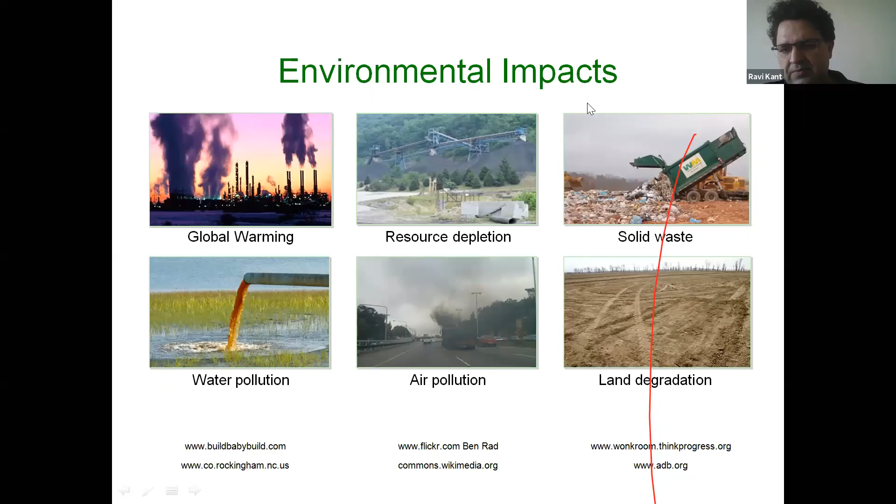Now, if you look into these issues which I just discussed, many people, if you ask the government also, those who are involved in solid waste management, say that it is very difficult to control, and it has been happening for years, so it is problematic. Or many have a perception that it is basically a material problem. And then there is the question: can we solve this particular problem?

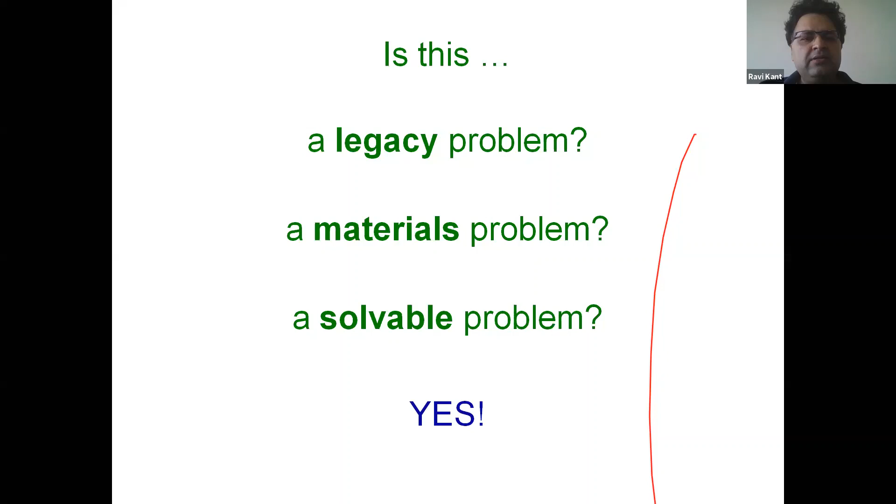These problems can be solved using the design for environment concepts. What is design for environment? It is a method to minimize or eliminate the environmental impact of a product over its life cycle. See, all products, from when they are manufactured, through their use, and after their use, this comprises the life cycle of the product. So we will discuss what is the broad life cycle.

But if you talk about the environment, then it has to be maintained over the entire product life cycle. Life cycle means when you are sourcing the raw material for making that product, when you are manufacturing it, transporting it, using it, and after the use when you are disposing of it. Effective design for environment practices maintain or improve product quality and cost while reducing the environmental impact.

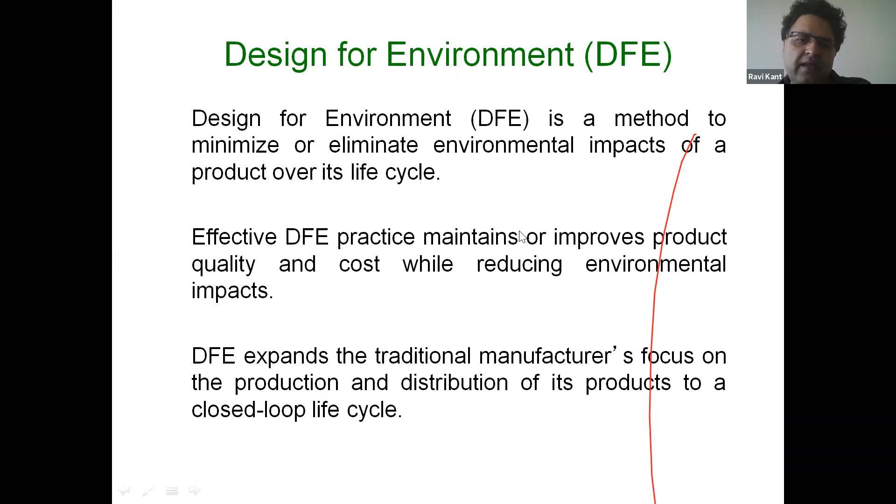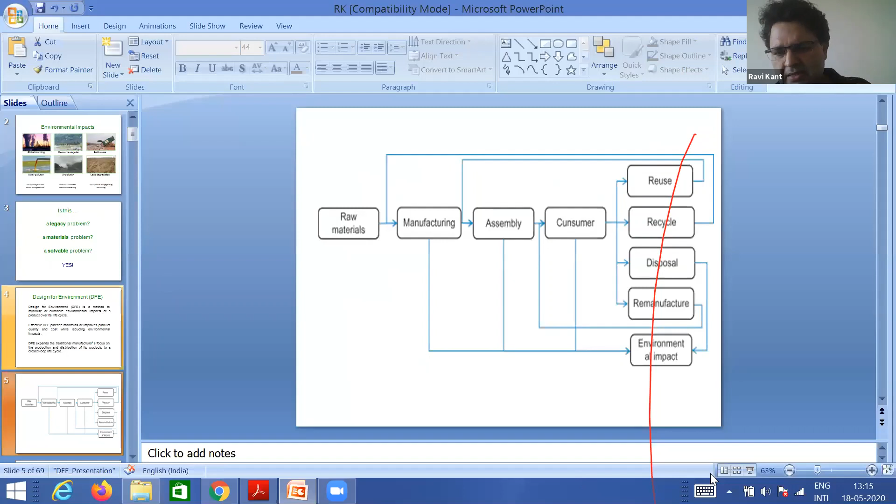So the major issue is that we are not compromising on quality, and it should also be seen that in making a product environment efficient, we should not unnecessarily increase the cost. Now, this is the screen which I purposefully put at the start. What is basically happening with the manufacturing or the product which we are using?

See, we have a raw material. This raw material is sourced from somewhere. Then we are manufacturing a product. Then we are assembling it. Then we are consuming it. And then there could be possible ways: either we can reuse the product, recycle the product, safely dispose of the product, or remanufacture the product.

Now, if you look into these cases, when we are disposing of a product, it is making an environmental impact. Now, how can we design a product which can be reusable, recyclable, remanufacturable, and if not these three, it can be disposed of safely to minimize the environmental impact?

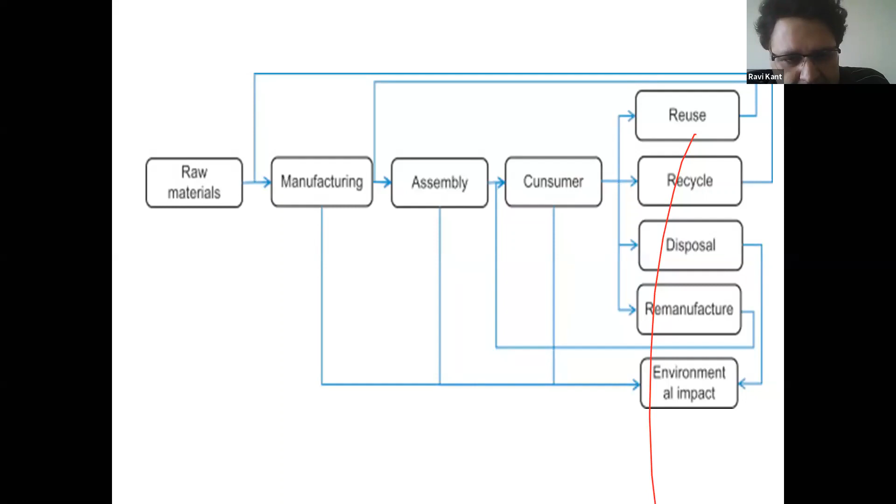If you do not think about reusability, recyclability, and remanufacturability during a design, then the major impact will be that when a product completes its useful life, so many recovery activities become impossible. If not the whole product, we should at least identify which components could be recycled, reused, or remanufactured. So our whole focus becomes the design part, where we have to design a product as per environmental needs.

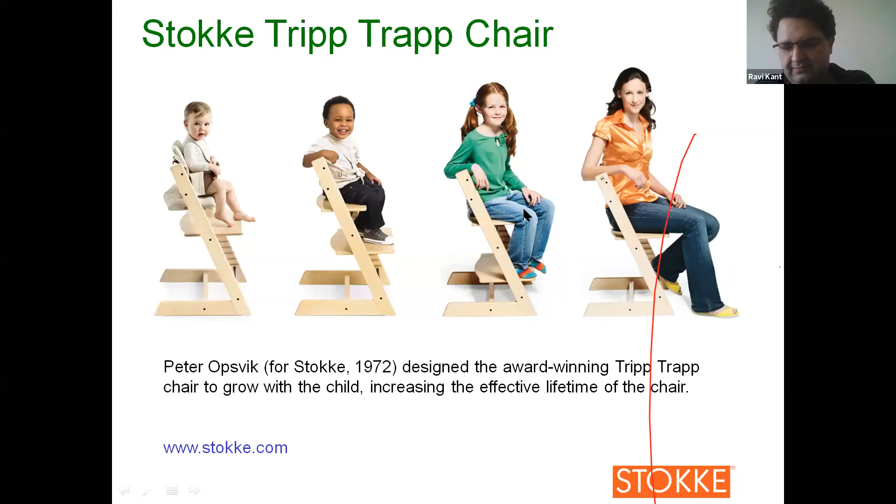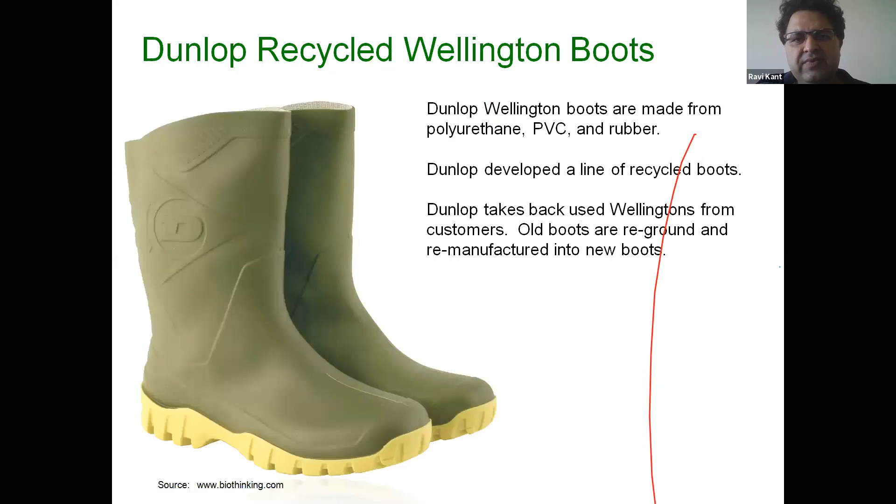Now let us go further. This is another example of design for environment, the Dunlop recycled Wellington boots. These boots are made of polyurethane, PVC and rubber, and all these materials are recyclable. They also have a policy where you bring the old boots and take new boots, and the old boots can be reground and remanufactured into new boots. This is a very good example where you can make shoes which can be recycled.

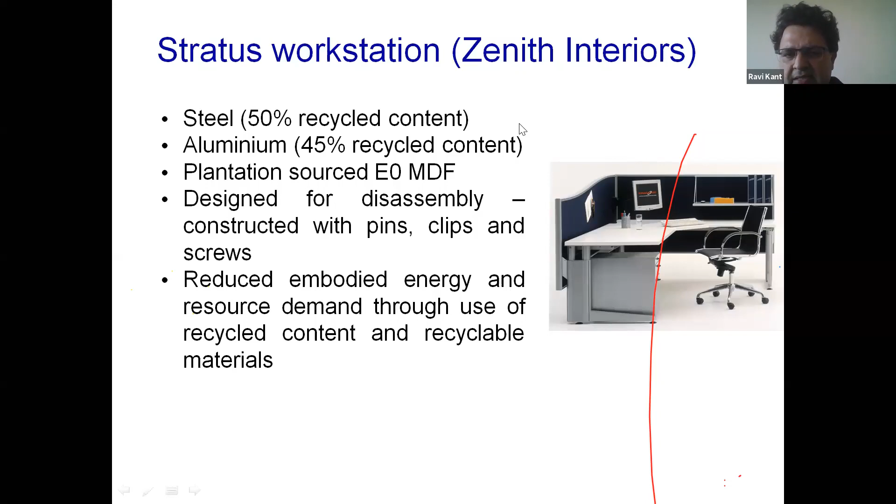Can we come out with technology to remove the yarn or threads from the cloth? And if we have a ready reckoner technology available cheaply, you can remove the thread or yarn, and then the same can be reprocessed and used into new cloth. So that is the bigger issue which we will be discussing.

Now this is another example of design for environment - this car by Daimler Chrysler, which is 2.5 meters long. What environmental guidelines have been used? Protection to the environment - they might have used environmentally friendly materials. The vehicle is energy efficient, and this energy is also one of the important issues.

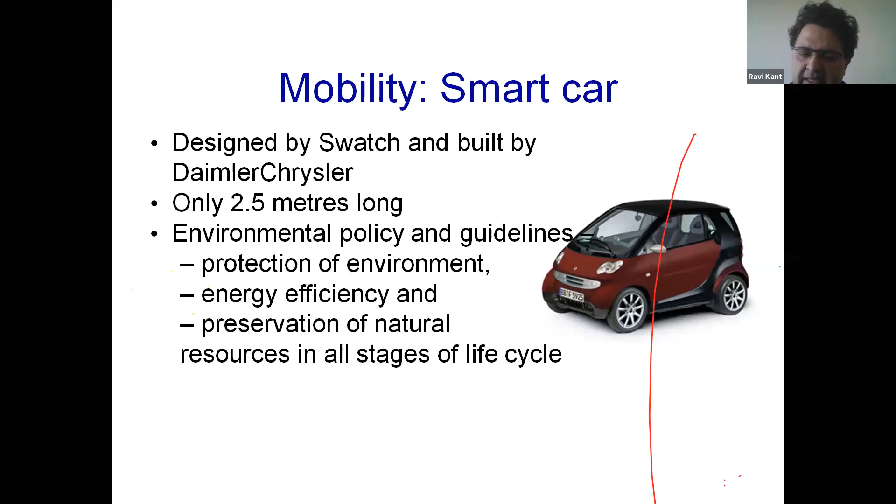When you design a product, and when it goes into production, if it consumes more energy, then we cannot say that it is energy efficient. Because of this reason, design for environment also looks beyond the perspective of design for assembly and manufacturing. You design a product which can be efficiently assembled and manufactured, and then the next stage you can think of introducing design for environmental concepts - or vice versa, the things can be possible.

Now this is also one example - the bathroom, Caroma Smartflush. We are not worried about that particular front, and when we go to the toilets, bathroom, we freely pour the water.

Now just think of a building which has been designed for the environment, and the water is transported to some high-rise building of the 30th or 40th floor. This requires energy. And if you use more water for flushing, basically you are consuming energy. If you are consuming more energy, then you are damaging the environment somewhere.

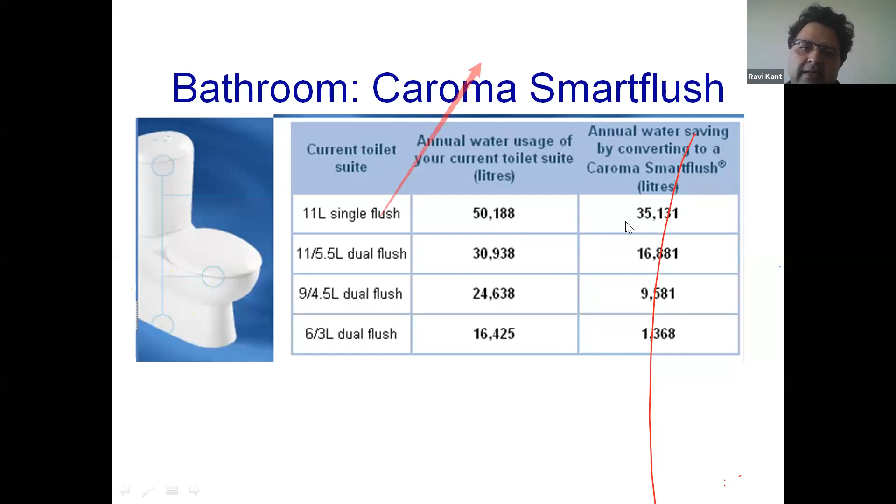Now this is also an example of design for environment. If you look into the x-axis, there is raw material, manufacturing, operation, logistics, use, and end of life practices. This is basically the life cycle of a mobile - the product life cycle of a mobile.

And if you look into the impact on the entire life cycle, the impact can be waste, use of hazardous material, water, energy, and total environmental impact. If you see it, the total environmental impact is highest during the component manufacturing.

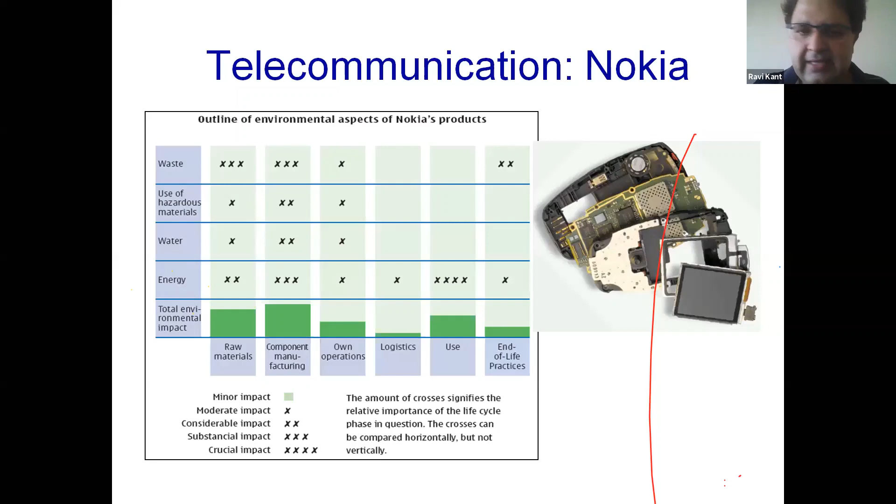So if you look into the figures, the cross marks available there show 3 crosses for waste, 3 crosses for energy, and 2 for this. So can our design minimize the waste, minimize the use of hazardous material, minimize the use of water during manufacturing, and consume less energy for manufacturing? Can we think of this? That is basically the prime concern when we are going into the subject of design for environment.

Now, if you want to study this design for environment.

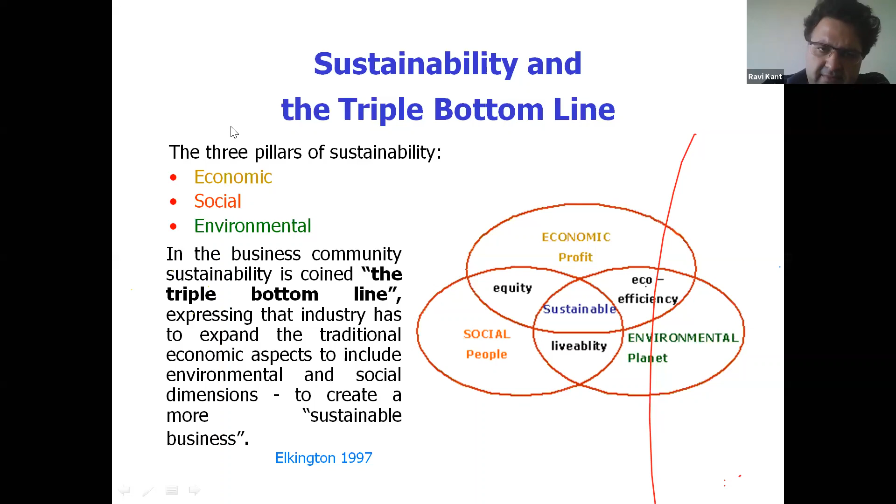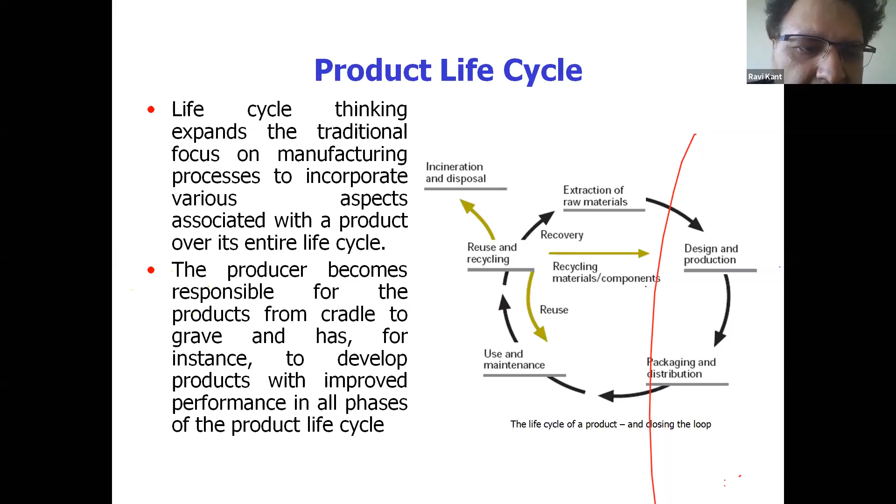Now, the important aspect is that you try to see that when the product is used, after completion of the life cycle, three things: if possible, it can be reusable, recyclable, or remanufactured - that is fine. If it is not possible, then when it is disposed of, it should not harm the environment. This approach is known as the cradle to grave approach. You can Google it and find there are many resources. There is one author who has written a book on the cradle to grave approach.

There are many examples, but I will skip most. There is this company known as Toms, established by a traveler who was traveling to Argentina, and he found there are so many children who are not wearing shoes. So he started the company, and today he has donated almost 60 million shoes to children around the world. This company is so important in this area because their whole business is sustainable, recyclable, and uses recycled and used materials.

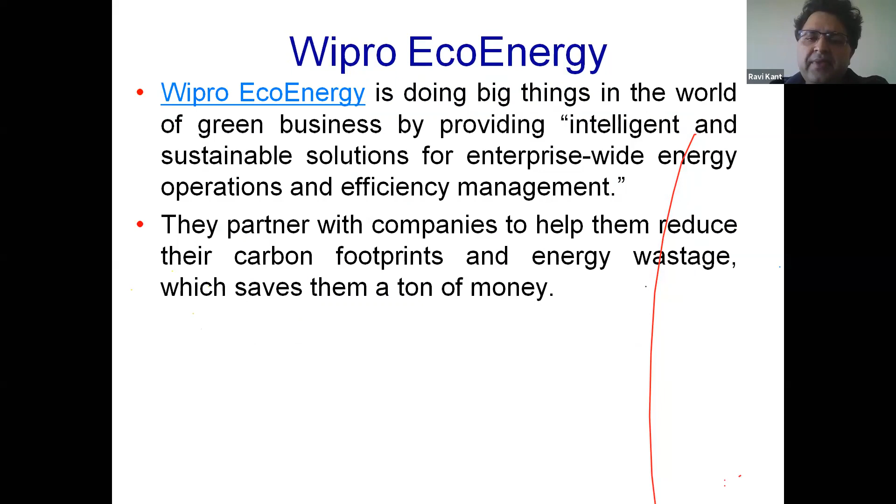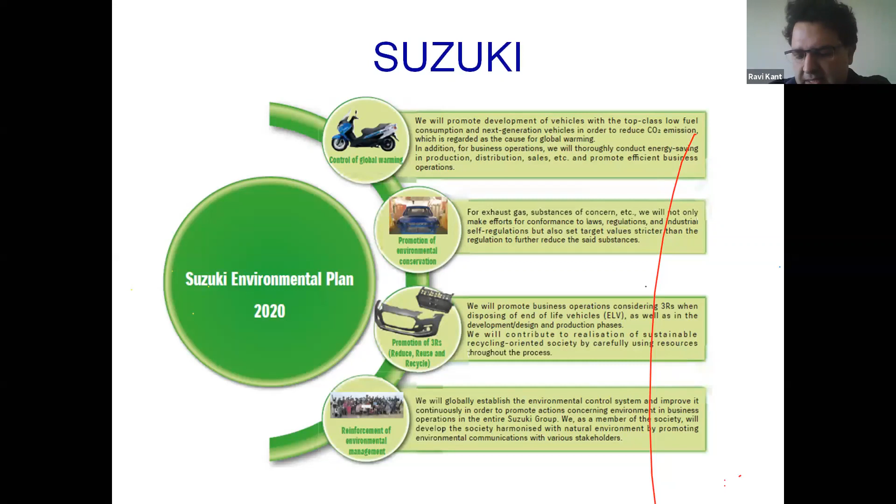Then our own Indian company, Wipro EcoEnergy - this company is also helping many small corporates manage the efficient use of product during manufacturing, with the major issue being reduction of carbon footprints. This is the Suzuki effort for design for environment, where they are promoting the reduce, reuse, and recycle 3R concept into their organization.

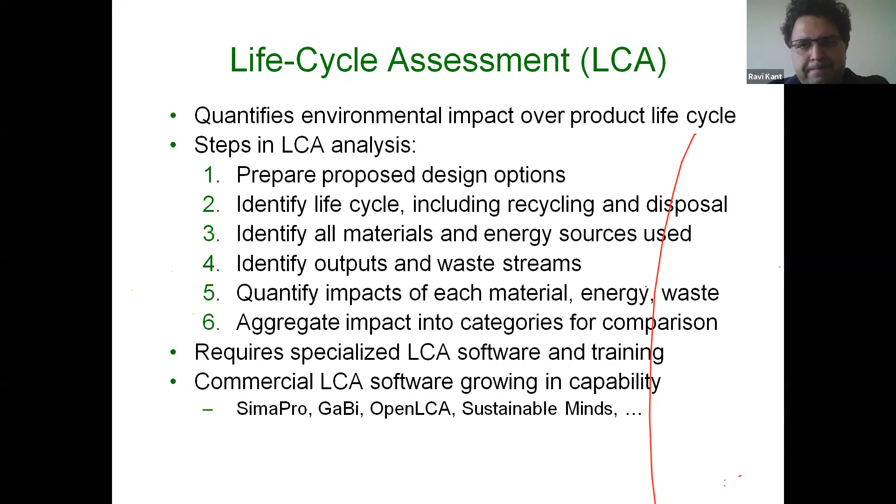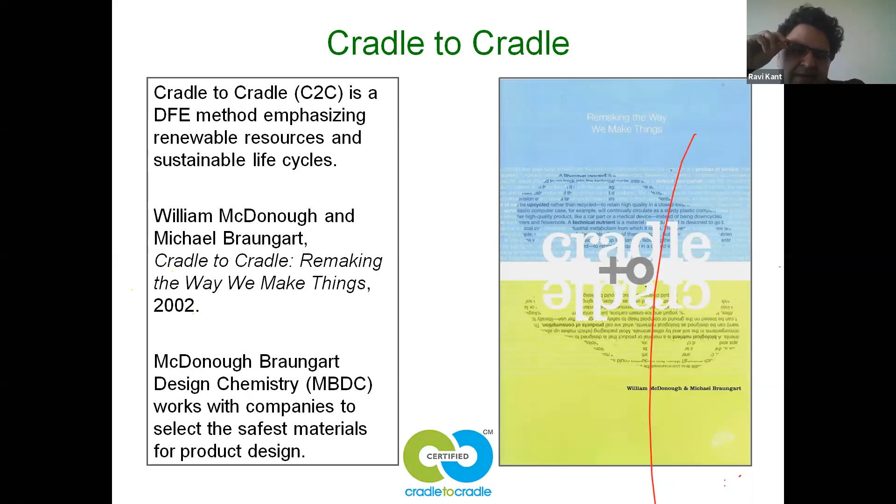Now, this was the thing I was talking about - the cradle to cradle approach. This is the book written by William McDonough and Michael Braungart. You should read this book, I think it is available on Google also.

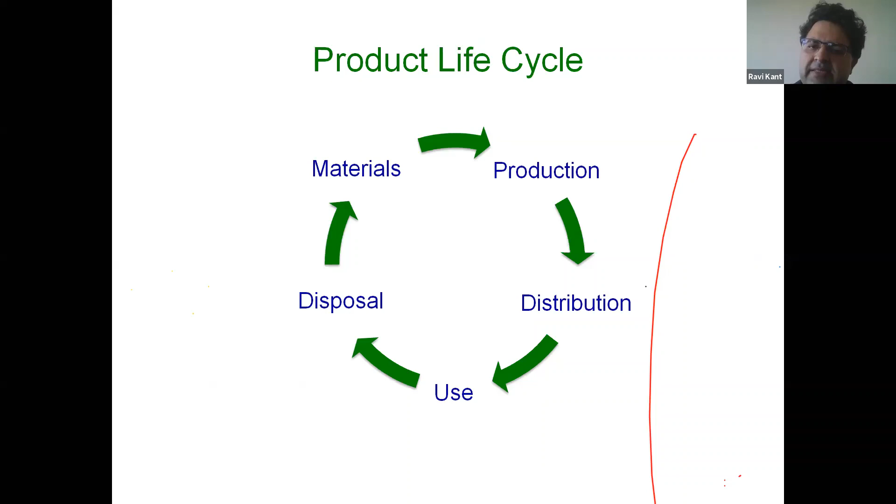What is the major contribution of this natural bio life cycle? Suppose when we are producing, distributing, and recovering, if the product can be recycled or remanufactured, it can go to the next level where it is converted into material and then used. But think of a product which cannot be recycled or remanufactured - then disposal is the important issue. When we think of disposing a product, the important aspect is that it should have a natural decay - meaning the product you are disposing of should go back into the nature from where it came. This concept is very difficult, but not impossible. Such things can be taken care of during the design stage only.

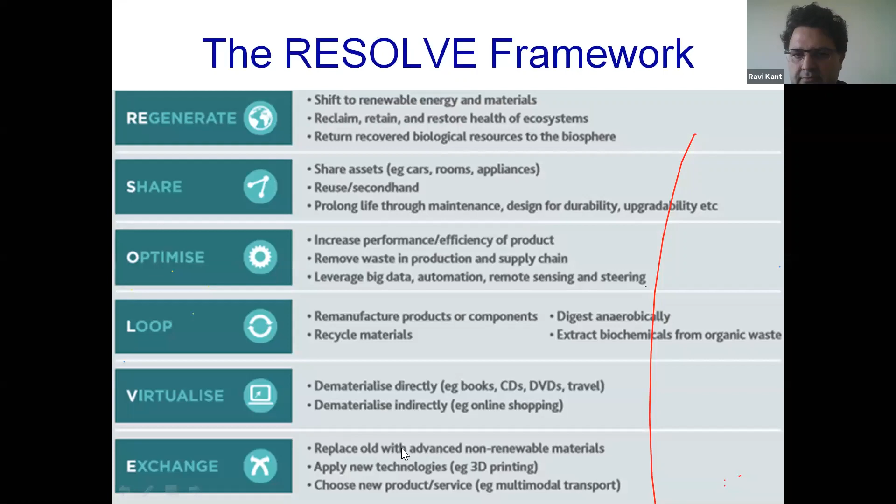Now, this is one example of design for environment, and this is the company named Dell. Everybody knows it. So, what kind of things are they doing? During design and building, they have precautionary use of chemicals and materials, because in computers, in many cases, it is not possible to remove the hazardous material. Still it is coming. Then Dell thinks of energy efficient product design, renewable energy, and waste avoidance and recycling.

Shipping also: they try to see that if the product is shipped, it uses sustainable, renewable packaging material and efficient configuration for smaller transportation footprints. This is also an important issue, because when the product is shipped from one place to another, it goes by road, air, rail or ship. And all these transport systems emit carbon, because they run on fuel. So this they also try to take care of. Then recyclable and compostable material, meaning the packaging can be recycled and composted.

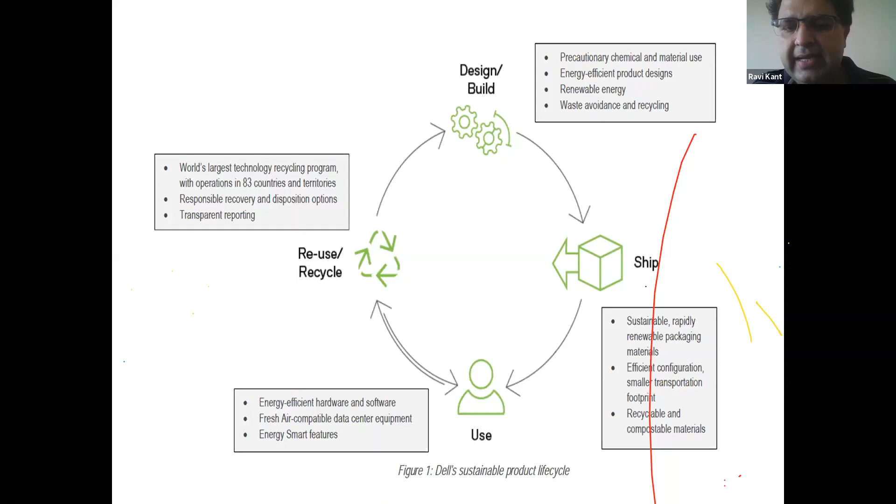Now, during use, they look at energy efficient use of hardware and software, fresh air compatible data center equipment, energy smart features, and then reuse and recycling. So Dell is mainly responsible for recovery and disposition options. Normally in our country it is not there, but in a country like the US, it is the manufacturer's responsibility to collect the items after use in many cases.

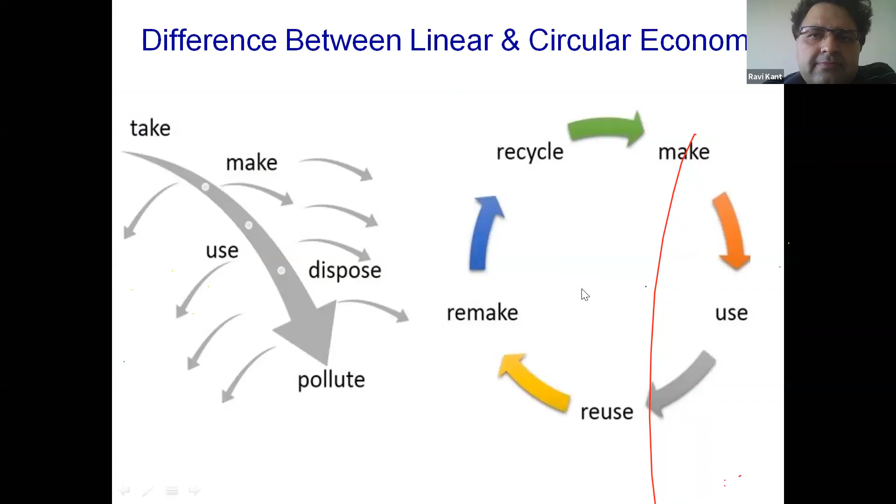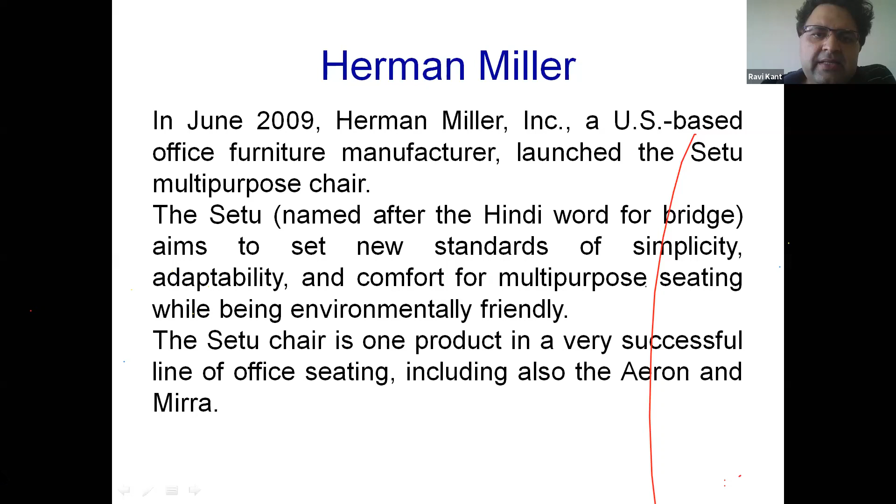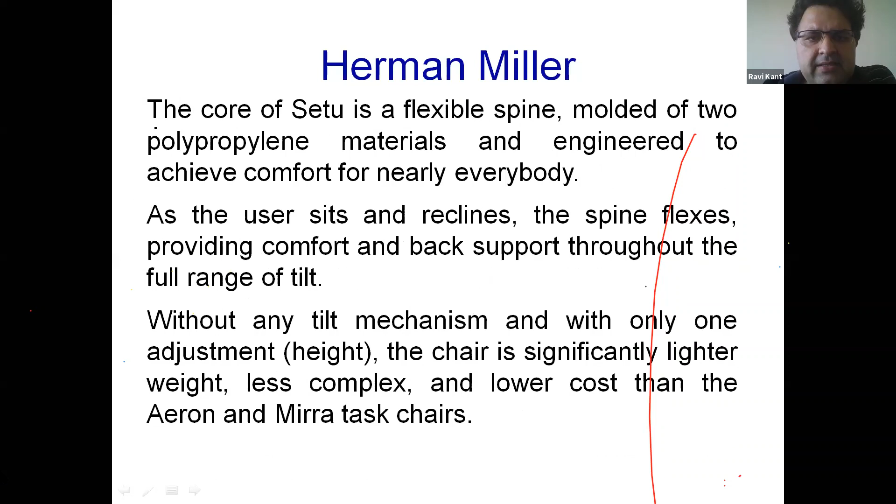This is another example, Herman Miller. This is the Setu chair, which has been designed by this particular company, and I will not go into a description of this chair, but what they did is more important. Now, if you look at the three chairs available, that is Aeron, Mirra, and Setu, you will find that this chair does not have as complex a mechanism as these other chairs.

Even if you look at the sitting arrangement and the rest arrangement, it looks more robust than these chairs. Now, the design for environment case study says that in these chairs so many hazardous materials were used, and the mechanisms went out of order after a certain time of use, and people threw those chairs away. Even many of us buy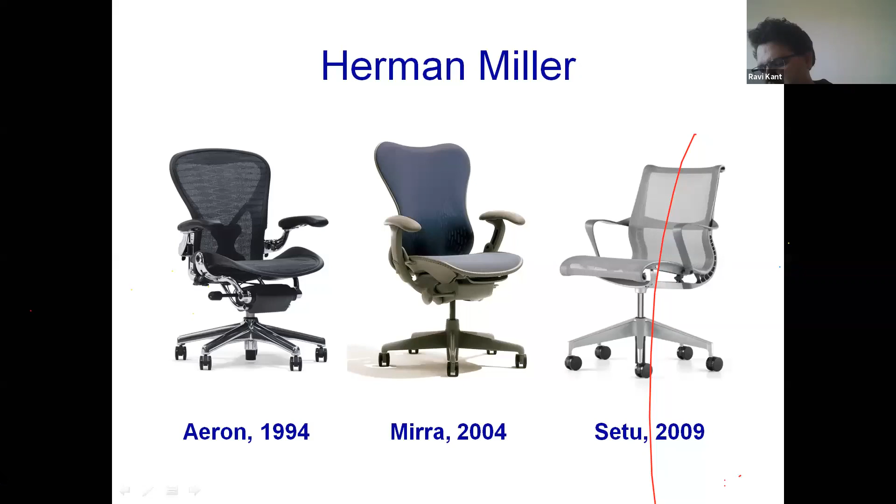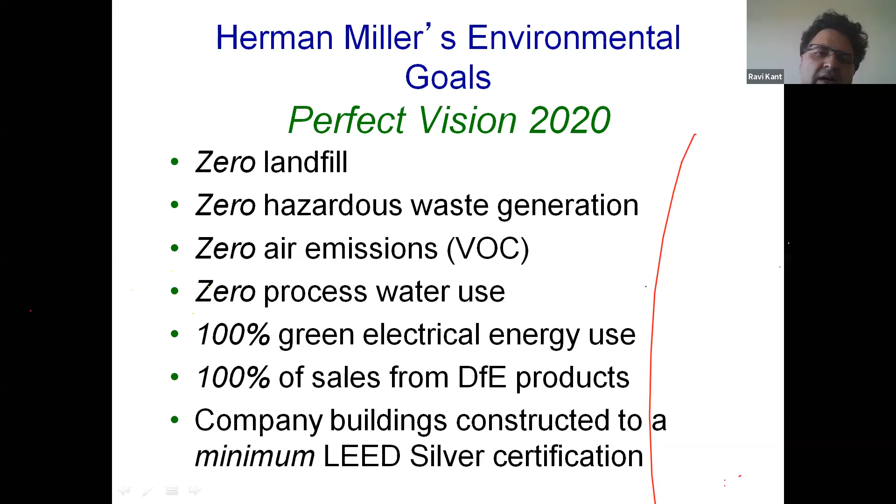There is only one spring for the tilt mechanism. Now, the important thing was that they have zero landfill. The materials were mostly disposable, decomposable. Then zero hazardous waste, zero air emission during manufacturing, zero processing water, 100% green electricity was used, 100% sales from design for environment. So this is the way these companies work, and I was talking about the tilt mechanism: there is only one spring.

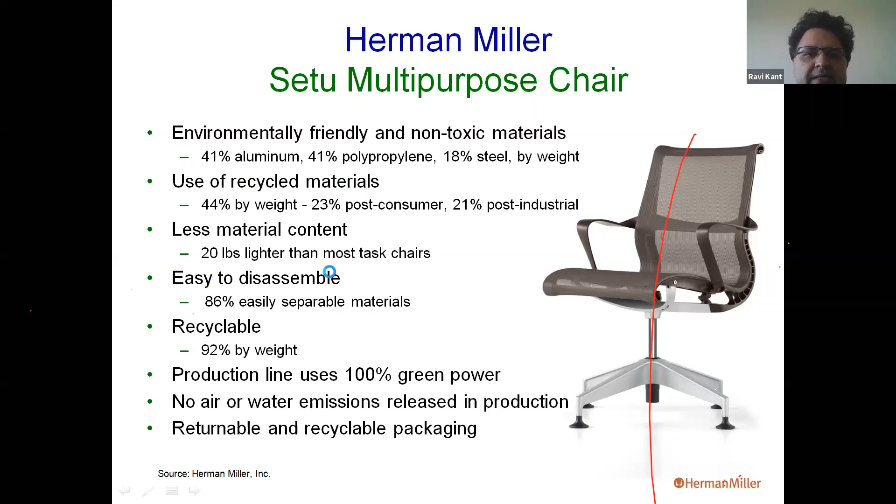Now, this is the LCA, life cycle analysis assessment, and they found out the composition of this particular chair: 41% aluminum, which is recyclable; 41% polypropylene, recyclable; 18% steel, non-toxic. Then it is recycled by 44% of the weight, 23% post-consumer, 21% post-industrial. There are many such things. My point is only one: if corporates have the commitment, they can really make things easier for society and easier for nature.

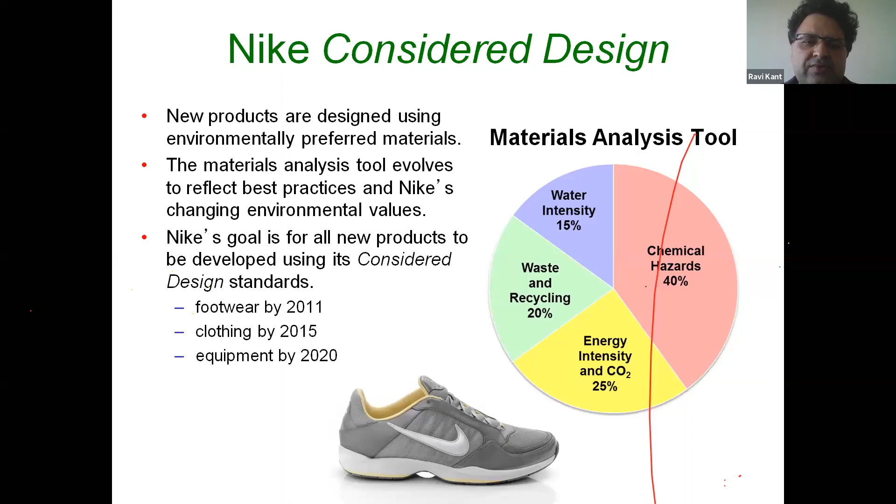And yes, it requires some effort on the R&D, and it requires some advancement on the material side. This is another example of a Nike shoe. So this is the company who is using recyclable material. So this I will skip.

Yes, yes. Tell me. Somebody raise hand so I can answer. Okay, fine.

Now we are going to the subject where we look into the normal design for environment process. So what is design for environment? The product development process is available in all industrial engineering books. In any book, you will find a product design and development chapter where this product development process is. How does the product development process start? It starts with planning, concept development, system level design, detailed design, testing, and the production ramp-up.

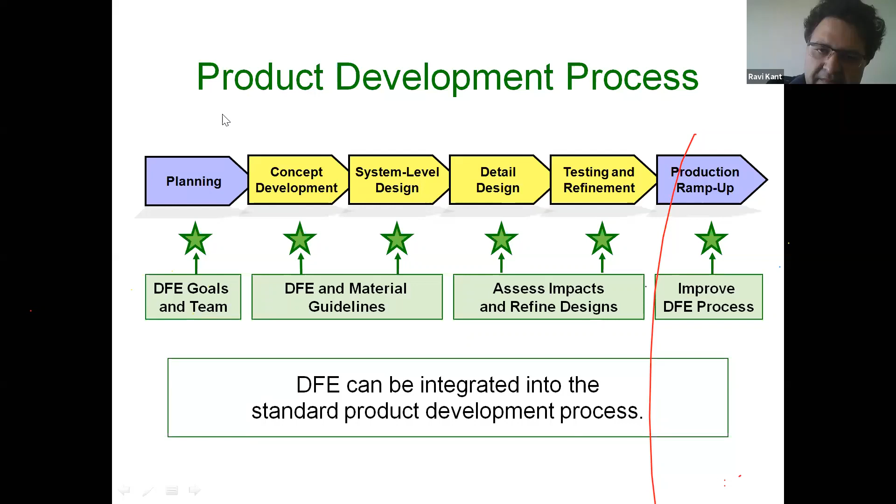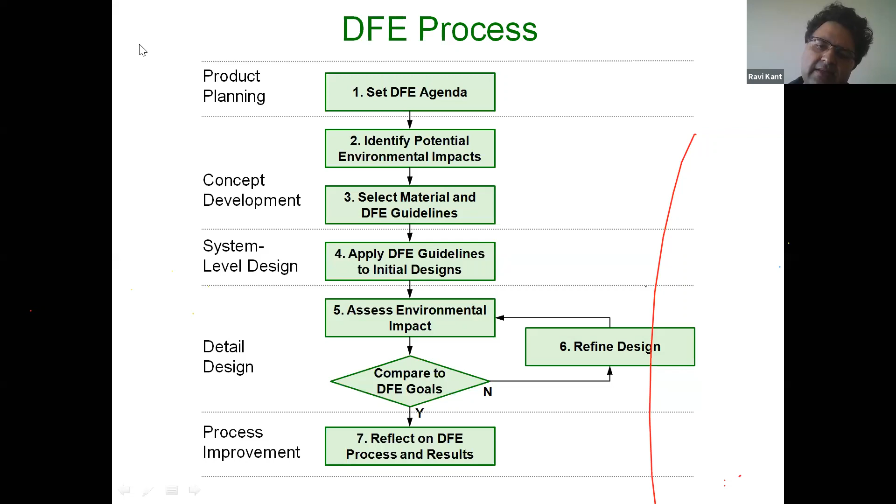If it is satisfied, then it is fine, and you go for the processing. If it is not satisfying, then you have to redesign and assess the impact again.

Now let us come to the first step, that is, you have to set the agenda. For setting the agenda for design for environment, there are three important things. So what are those important things? The important things are the drivers, goals, and the team.

Now if you look into the drivers, drivers can be internal drivers and external drivers. The internal drivers are product quality, public image, cost reduction, and innovation, then operational safety, employee motivation, ethical responsibility, and consumer behavior.

Now, I will not go through all, but let me explain. Unless the organization has been motivated to introduce the design for environment concept in their product, implementation is not possible. Suppose you have a product and you want to apply a design for environment concept; unless you have a driver, it is not possible.

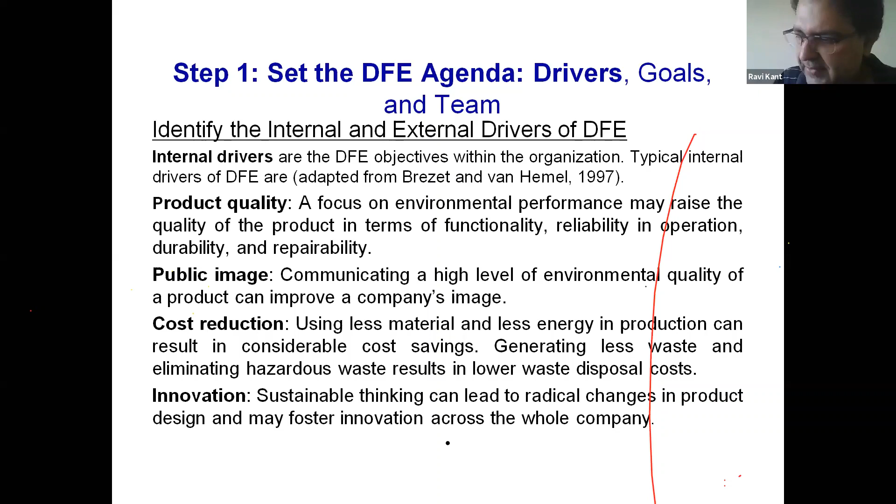If you look into the same example of the Setu chair, you might have seen that they made this chair very simple. Since the chair was simple, the cost of material was saved, and the cost of energy was saved during manufacturing, and then the innovations, then the safety. If the workers or staff understand that we are using a toxic material, and we can design a product which eliminates the toxic material, then the employees will be motivated.

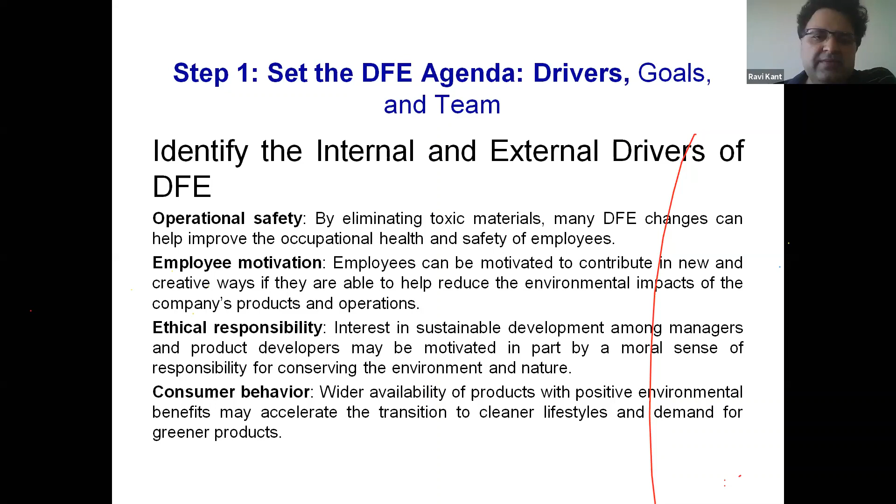And moreover, at present it is an ethical responsibility, because this planet is not the responsibility of one, two, or a few governments. It is the responsibility of everybody, and corporates have to come forward, because the major damage to our environment is happening due to manufacturing. Manufacturing includes everything, even construction. If construction also uses the concept of design for environment, the dust and other things spreading into the cities can be avoided, if companies follow it.

Now external drivers: for somebody who is not following it, we can come out with legislation. You can create a market demand. Now how will market demand be created? The government may come forward by giving subsidies to environmentally friendly products, the way they did through the Achhe Urja scheme, providing subsidy on solar panels.

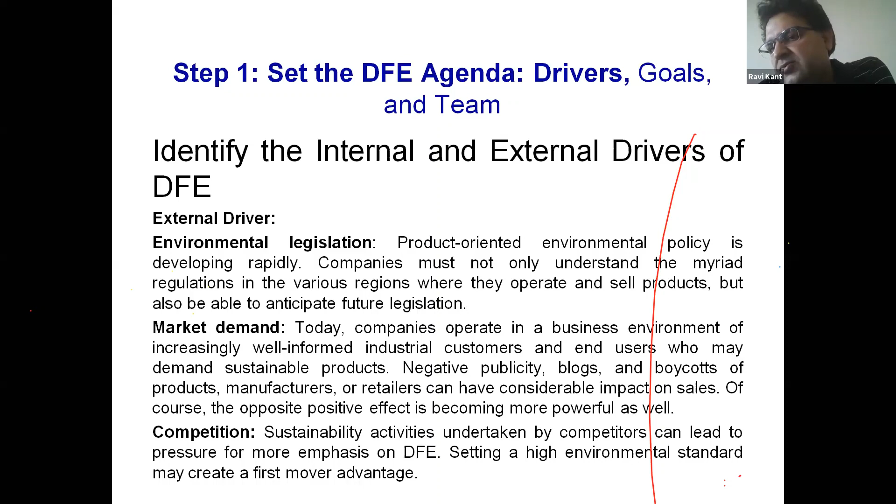Mostly in Gujarat, most of the houses are using solar panels, which have been supported by the government, and they are contributing to the grid also. The excess power which has been generated goes to the grid. Then you try to create competition. Then trade organizations, suppliers, and social pressure can motivate companies to adopt design for environment.

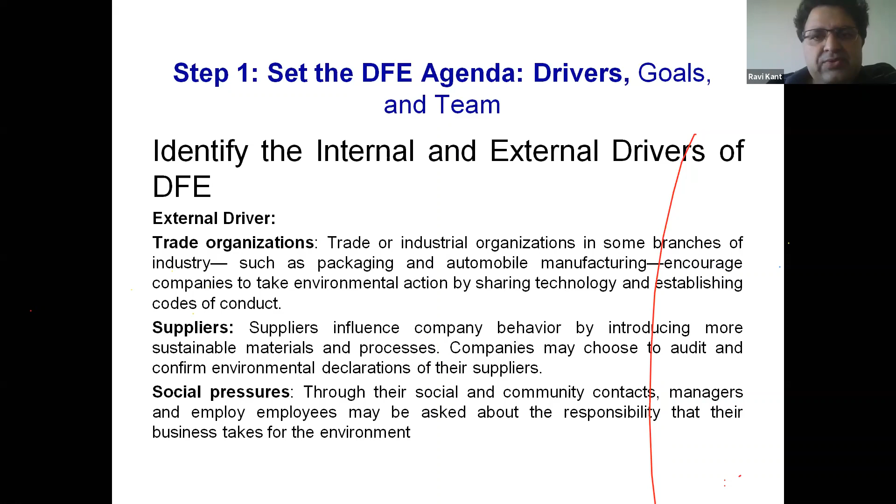Now the second part is the goals. Some of the goals I will just read out. If the life cycle stage is material, the goal is to reduce the use of raw materials. Choose plentiful renewable materials, so that materials can be recycled and reused. It is a very efficient way of design for environment. Eliminate toxic materials. Reduce discards and waste. These are some of the environmental goals which can be decided by the company.

Suppose I am not able to eliminate the toxic material, can I minimize it? If I cannot minimize it, can we think of reducing discards and waste? Can we use recovered and recycled material? In India, slowly the secondary market is coming into the picture, where remanufactured products are openly sold. With mobiles, companies who buy back old mobiles and replace them with new ones do a certain level of refurbishment, and that mobile is sold again in the market.

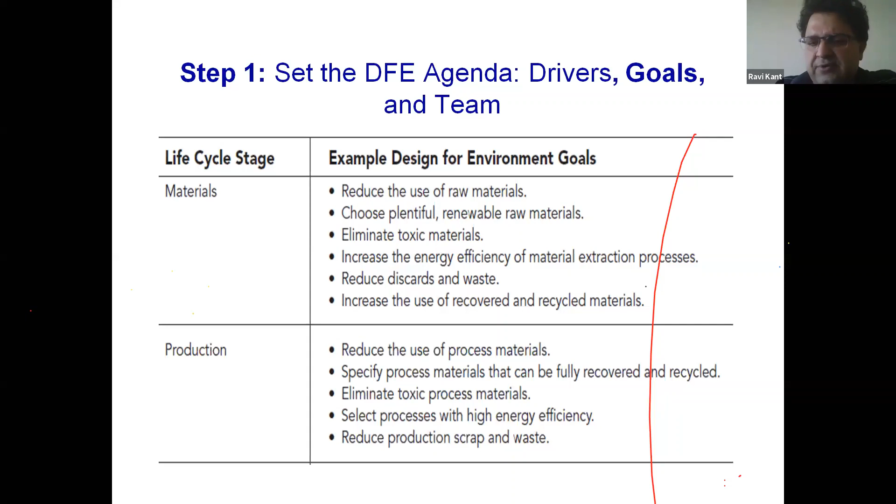Even a simple energy audit and monitoring can make the processes energy efficient. So you have to decide the goal. So in the case of distribution, reduce emission of transport. So you use a system which can minimize the carbon emission.

And there are many, like suppose the rail transport is basically more efficient, more energy efficient, or producing less emission than the

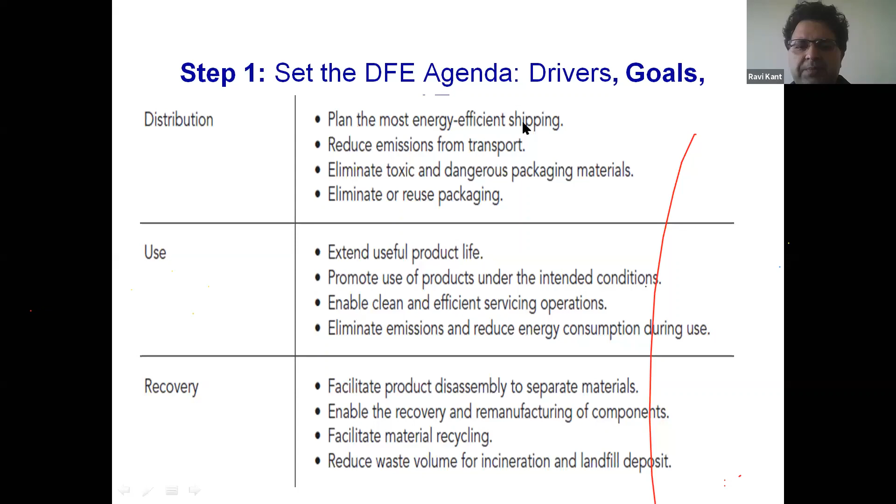And if you really think on that particular line, you will be able to set the goal. But whatever slide I had shown, it is very limited. There are many, but my idea is that at least you focus on a few of the things in one shot, which the company can do. It is not possible to replace all the material immediately with new material, because our processes are set, our machines are procured. So can we do other things other than the material replacement? Then it is possible.

Then who can lead this particular DFE set? You should have a DFE leader, design for environment leader. Then we should have environmental chemistry, then manufacturing engineers. Then you should have a representative from purchase and supply chain organization. It is better to have people from all of the areas, keeping in mind concurrent engineering. Design for environment is one aspect, but let us not make it conventional engineering design. It should be a concurrent engineering design, where any people can be contacted at any time.

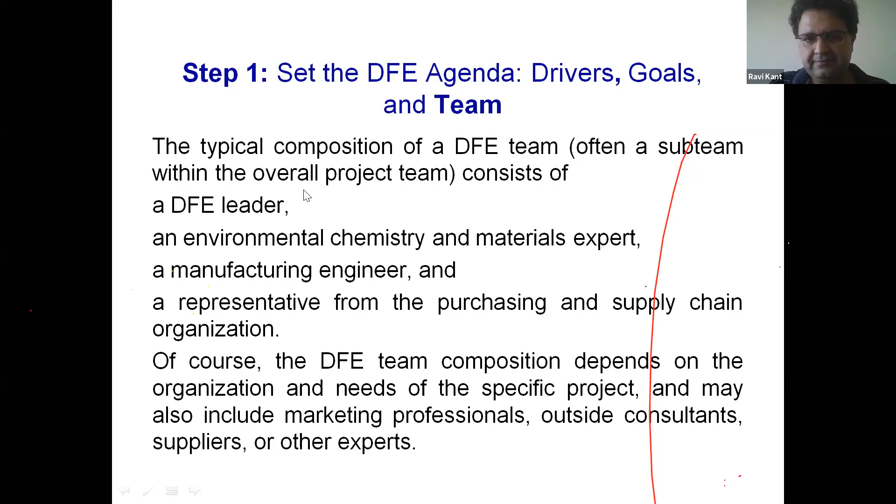Now you try to identify the potential environmental impact. These have been prepared the same way, like for the materials. If I have a question: how much, what type of recyclable material will be used, how much, what type of non-recyclable material will be used, how much, what type of additive will be used. If you come across such type of reasoning, then the problem is solved.

So see, designing is a very innovative process. Not all of us can do that. But yes, if you think on that particular line, at least if you find a material and just think whether it is recyclable or non-recyclable, you cancel the non-recyclable material if it is not mandatory to use, right?

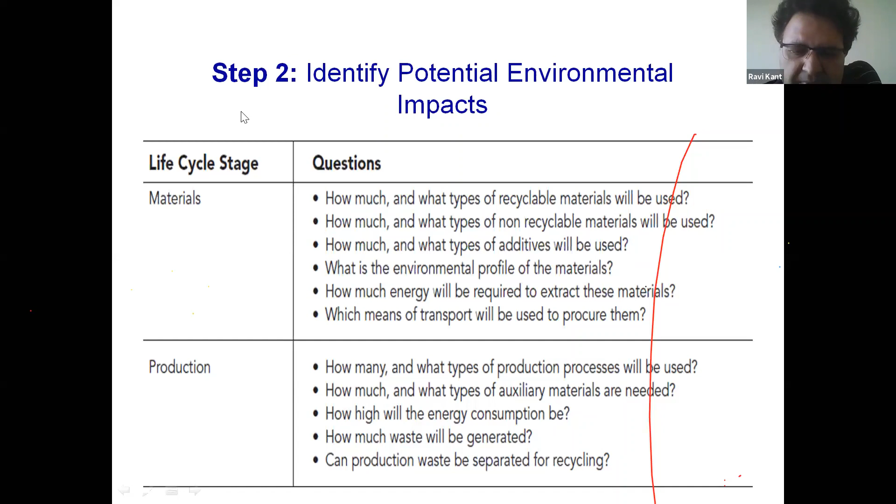Now the second case, where the production is happening: how many and what type of production processes will be used, how much and what type of auxiliary materials are needed, how high the energy consumption will be. So all these points should be answered when we are going for the design for environment. Then on similar lines, there are the questions for the distribution. Then there are the questions for the use.

So what will be the lifetime of the product? How much maintenance and repair will come? See, suppose the lifetime is shorter and maintenance and repair is higher. There is no question of making such a product, even if its environmental impact is low. You are getting my point. A product which has a low environmental impact, but the lifetime is very short, and a lot of maintenance and repair is going to happen. So you have to think of that.

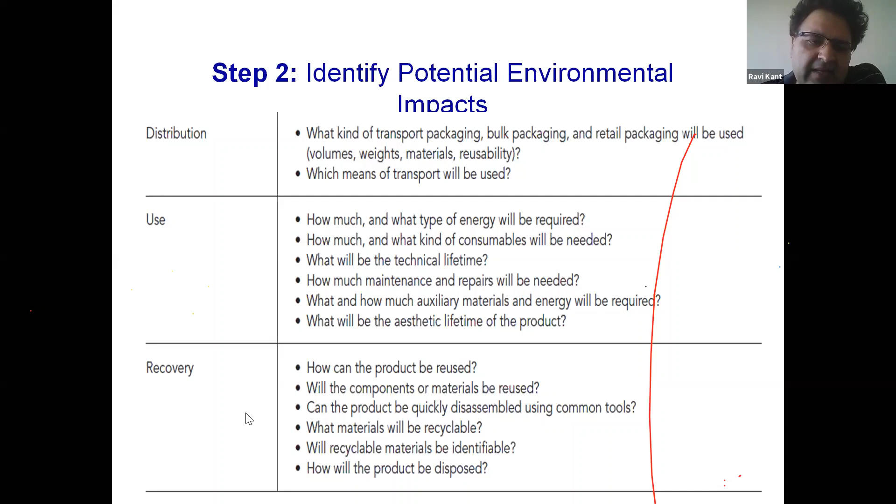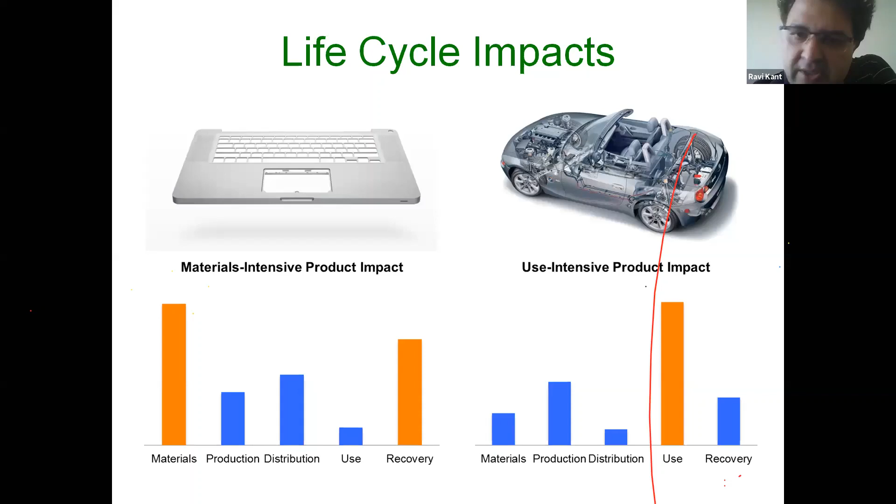Then in the same way, there are the questions for the recovery. See, this is the life cycle impact, which is in the cover of your laptop. So you will see it is a material-intensive product impact. But if you look into the automobile, the impact is higher in the use. So if you are designing an automobile, our whole focus should be on operations, how efficiently we can design a system which can consume less power, less energy. But if you think of a product like this, material is one of the important issues. So that is the way it has been taken care of.

Now the third stage is the design for environment guidelines. So there are many guidelines available, like sustainability of resources: specify renewable and abundant resources. A better design is one where the resources are renewable and abundant. With scarce resources you will always be stuck, because material availability can be one of the issues. And if the material is recyclable, it is more attractive to us.

Then healthy inputs and outputs. So you try to see that we are using non-hazardous material, install protection against release of pollutants, and suppose if it is compulsory that hazardous materials or substances have to be used, then you should have a protection. Then how will somebody know whether it is hazardous or non-hazardous? The labels are coming. When you buy a product, if it is recyclable, the recyclable sign has been put. If it is hazardous, the black hazardous sign has been put. So now these practices have started.

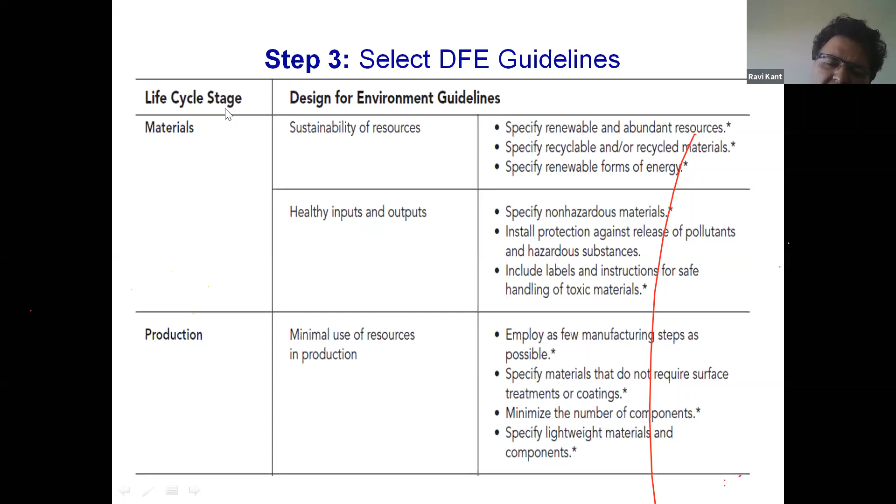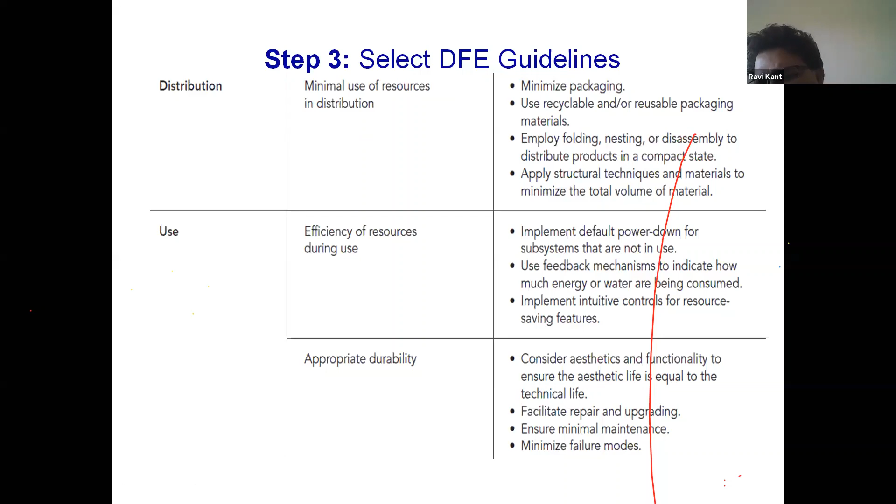So unnecessary machining should be avoided. Because if you do unnecessary machining, there will be energy consumption and you will come across non-efficient processes, and then it may not be an environmentally friendly product. So in a similar way, during distribution and use the guidelines have to be followed. In case of distribution, use recyclable or reusable packaging materials. Then this is a long list, even longer than this. So I have just used some of the portions.

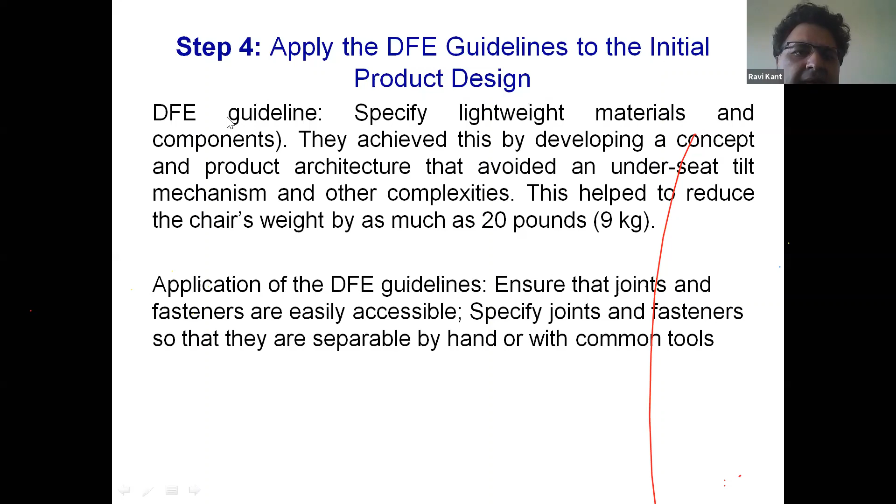Then you apply design for environment guidelines to design a product. So you had selected a goal, you had decided the impact, then you decided a material, then you designed a product. And after doing this product design, the next stage is that you have to go for the life cycle assessment of the product.

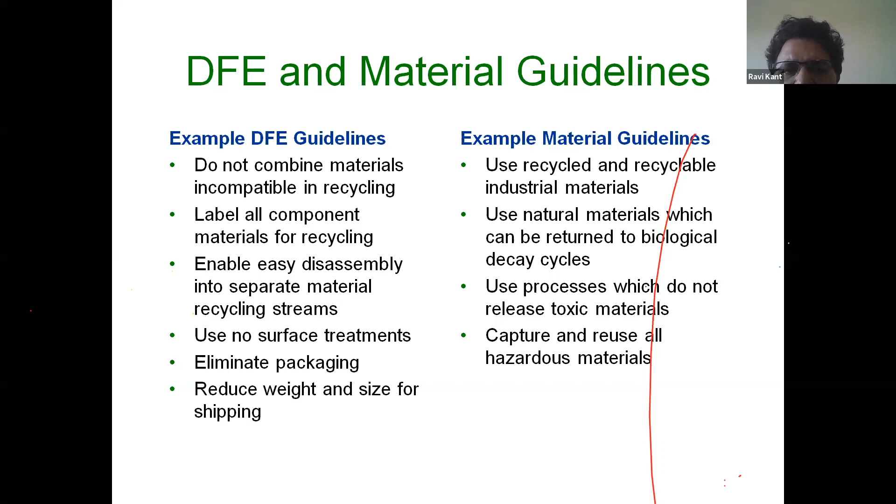And then you see that whatever the goal which we had set for a product into the particular category, whether it is met or not. If it is not met, then you have to again think for step 3, where the things have to be redefined. You can again do the life cycle assessment, and if the goal is met, you can manufacture the product and then it can be used. So this is the way how it has been taken up.

We say that it is difficult, but it is important, and it is our responsibility to have a product which is having a lesser impact on the environment. And everybody has to work hard in this - business and entrepreneurs, scientists, engineers, designers and researchers. If everybody comes together, then only the things will happen. So everybody has to take ownership of the responsibility for that.

I will hand over this to Shinde Saheb.

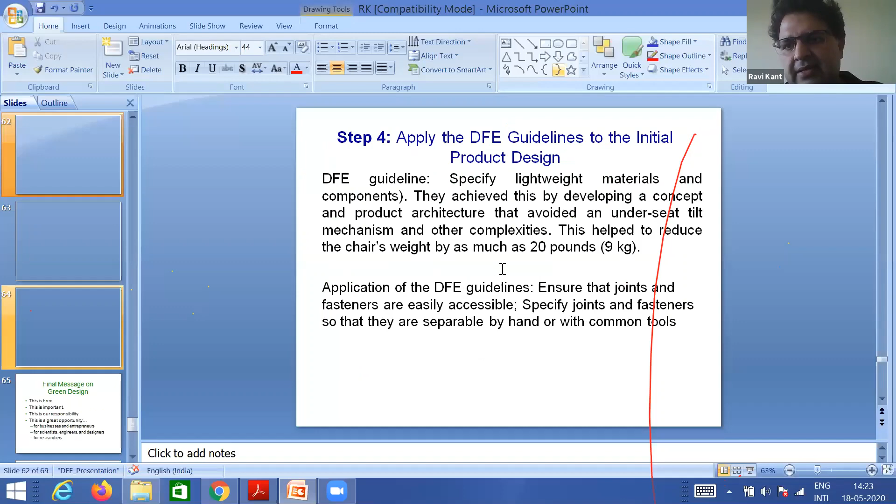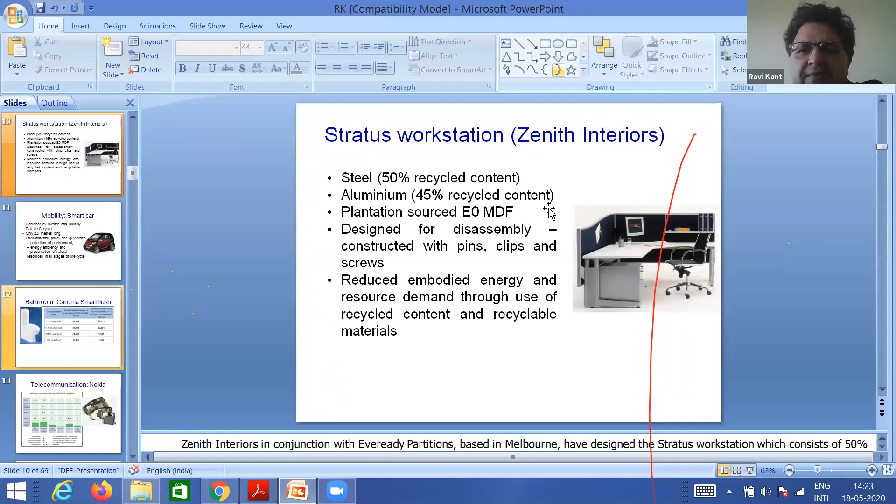So thank you all for your patience hearing. There are so many things I skipped because it was not very much useful to you. But at least this particular area has a wide scope to work on.

Either you are a researcher, or a UG student, or a PG student. So I had already completed it. I thank you all for patience hearing, and I thank Professor Vilas Shinde ji, who had given me this opportunity to speak in front of you.

And yes, I will share the PDF. I will unmute all.